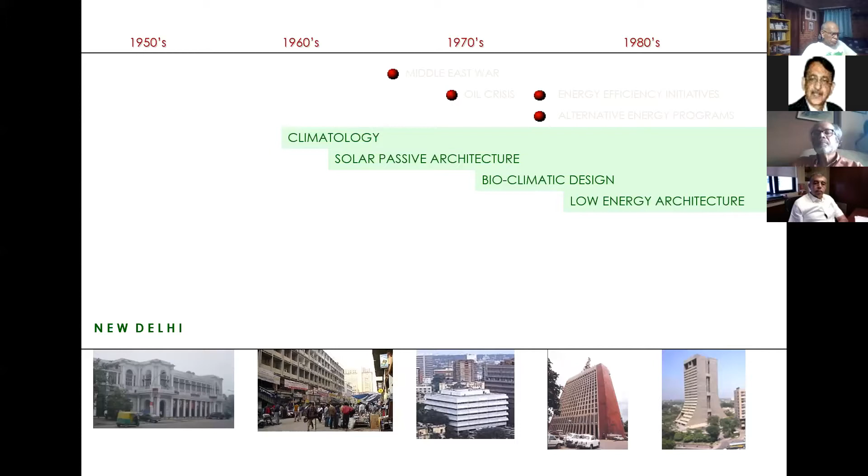They called it solar passive architecture. In Europe, they were talking about catching energy from the sun so that you can warm your spaces and not rely on oil anymore. Then they talked about bioclimatic design when this concept got referred to different parts of the world. And as you realize that oil is actually a limited resource in the final analysis, there had to be something called low energy architecture. And this went on.

Eventually, after the Rio conference, the notion that it would have to be broader than simply energy, environmentally sustainable architecture, was born. Later, as the developing world started growing rapidly, especially the tigers of the Southeast, you suddenly realize there's going to be so much building that architecture has to play a part in the strategy for sustainable development of these societies, these aspirational societies across South America, now Africa, and the East. So that's a very brief history of how you move from climatology to architecture for sustainable development.

Well, you can see these two pictures. What we see at the bottom is at the expense of what we saw at the top of this picture. That was the death of the environment of the seas. With the rapidity and the scale of production of the built environment, which is causing environmental degradation and ecological stress, now a designer must also necessarily become a steward of the environment.

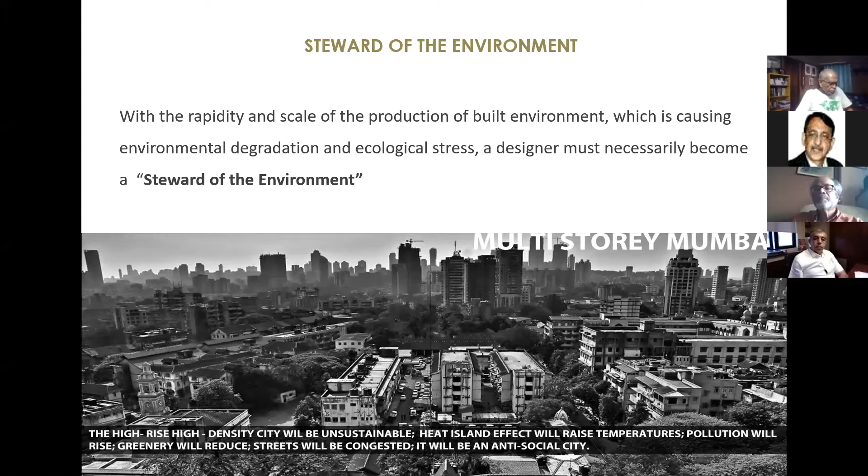So here we are. These are the three realms I'm talking about. That architecture is and will always remain a cultural artifact, equivalent to poetry and music and song. And that is where it actually has its communicative power.

But in doing so, it must also be a development practice. It must be done in ways that promote development of society, looking at its current issues that concern most of us citizens, and then finding solutions for them. And in doing that, it must also be a stewardship of the environment that architecture grows out of.

So what I'm going to do is share some projects, some more complex, some built and some not built, because I think even when something is not built, its ideas are worthwhile and worth sharing with you all.

So this is a tiny little project called Butterflies for an NGO on the outskirts of Delhi in an urban village, squeezed in a rapidly changing urban village in a long, narrow plot. It's a society that is looking after street children and providing them wherewithal to grow into independent, skilled persons.

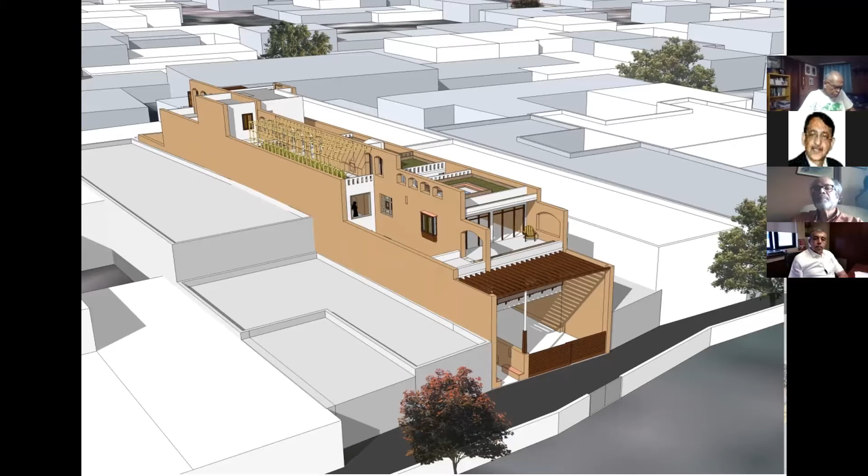So the first thing about it was, it's a long, narrow plot serviced by a narrow lane. We are densifying an existing urban village. What should we do? How do we go about it? What is the morphology of densification that we can develop?

Within this lane, there is a long plot, and on the edge of this plot there's an inner lane. This inner lane effectively connects three buildings around tiny courtyards. So this is like discovering a morphology that will be climatically suitable and maintain pretty good densities with good light, ventilation, and everything, and also accommodate a variety of functions within, just like the old city used to do.

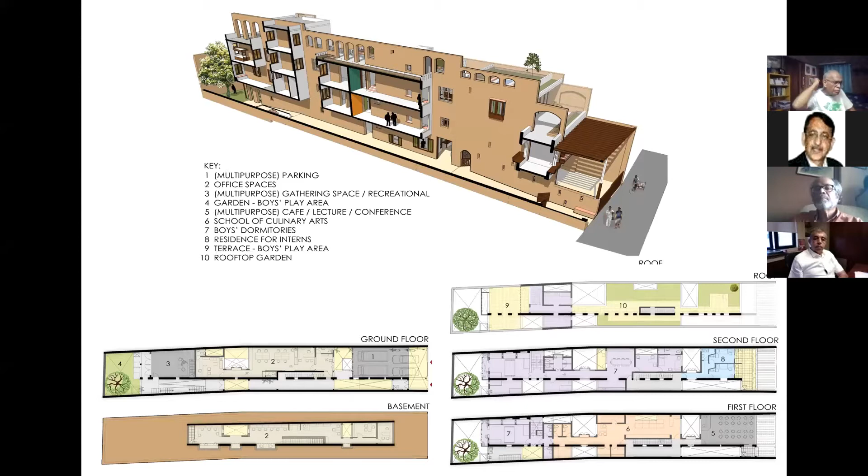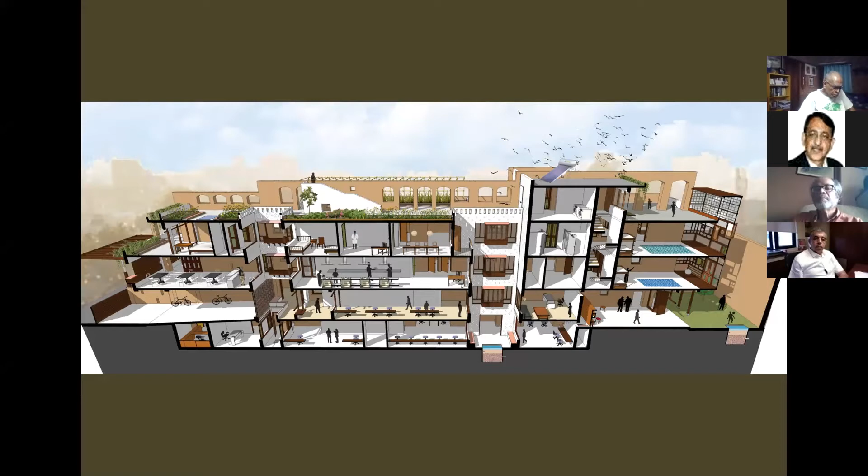So here you can see two courtyards bringing light and air even down to a basement. The basement was a kind of resource - it was where the earth came out from, and that earth could then be converted into earth blocks, cement stabilized earth blocks that could be used for raising the building.

So the idea is that as an existing city or urban village regenerates, actually what's happening is a lot of stuff is being taken down and a lot of stuff is being built anew. There needs to be an attempt at a circular economy within such urban precincts and urban systems.

So the first thing is, of course, we take the earth out from the ground and convert it into bricks. And then, on the right-hand side, you scout around and see what you can get secondhand - doors, windows, stones, metal - and see if you can incorporate that into your building.

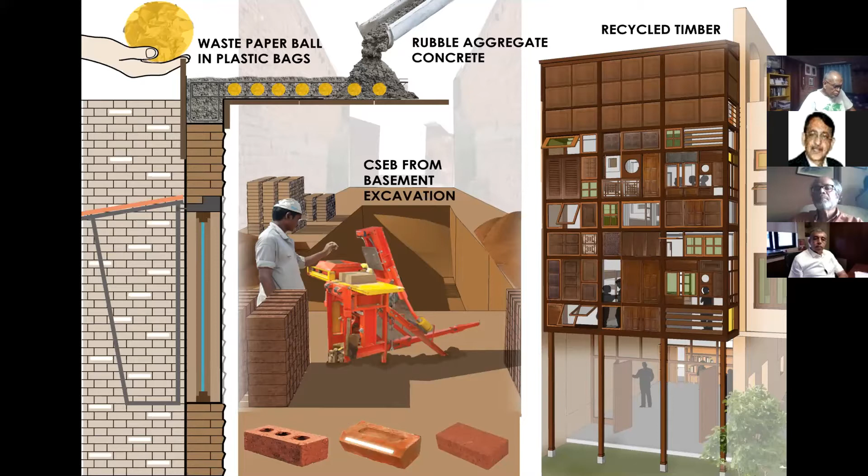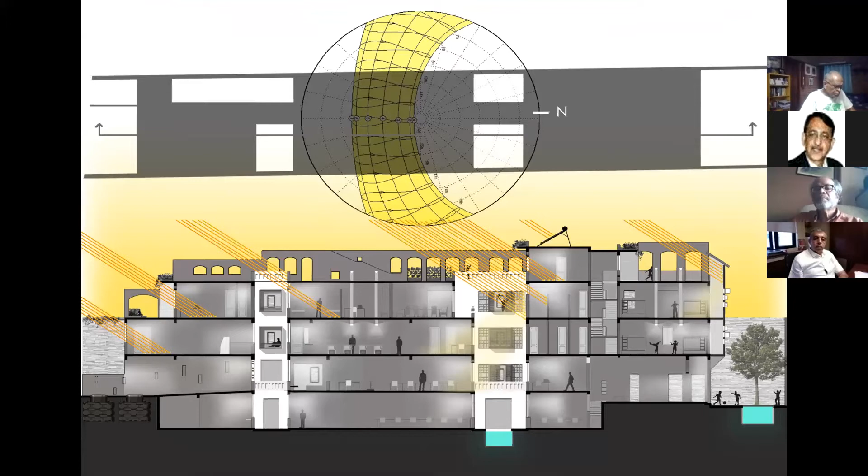And then, as you design very dense, like the old cities, teeny courtyards, you design them in such a way that light does get down to the bottom. In winters, the upper story gets plenty of sunshine, and you can get the air and wind blowing through or flowing across the spaces to maintain reasonable comfort.

And then you make the courtyards very special. You integrate ventilation systems, exhausts, cooling pads, evaporative cooling, a little fountain in the courtyard as a way of producing reasonable comfort without air conditioning in the spaces of different kinds of uses.

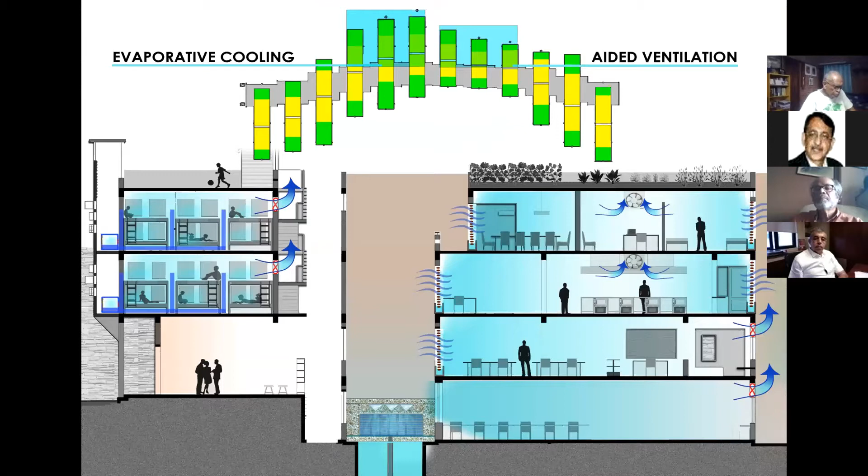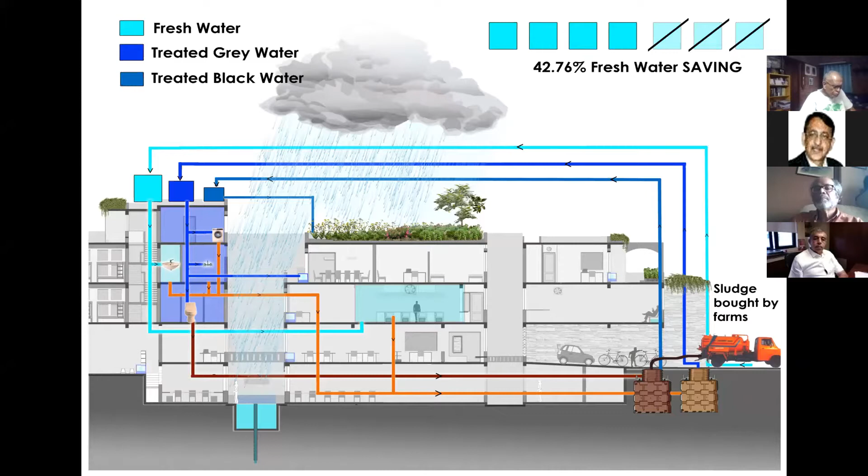And you will also have a rooftop, which will then convert into a vegetable garden. Within that plot, you must see how you handle water - how you collect the rain, how you use that water, store it, utilize it, treat it, recirculate it, and then use it again for your roof garden and for flushing.

Well, this is how we imagined the children's dormitory to be. And here are the kids now peeping out from their dormitories with secondhand windows, as you can see. Everything is gathered from the local market, believe it or not.

And this is the middle courtyard. We were lucky sometimes to get some really beautiful doors and windows too - we just scout around in the local market.

And the little courtyards - you can see how little courtyards can do wonders in a climate like Delhi. And on the rooftop, you can add solar PV.

And here you can see how the earth blocks are part of the interior spaces, for people to know that this building is built majorly out of the material that came out from the basement.

It's an aspirational building. This staircase on the right-hand side is on the roof, and it leads to the sky. Believe it or not, that's where children like to be most. So it's not only about the recycling, the materials and the climatology, it's about how it produces a certain sense of well-being as you connect with the environment around you.

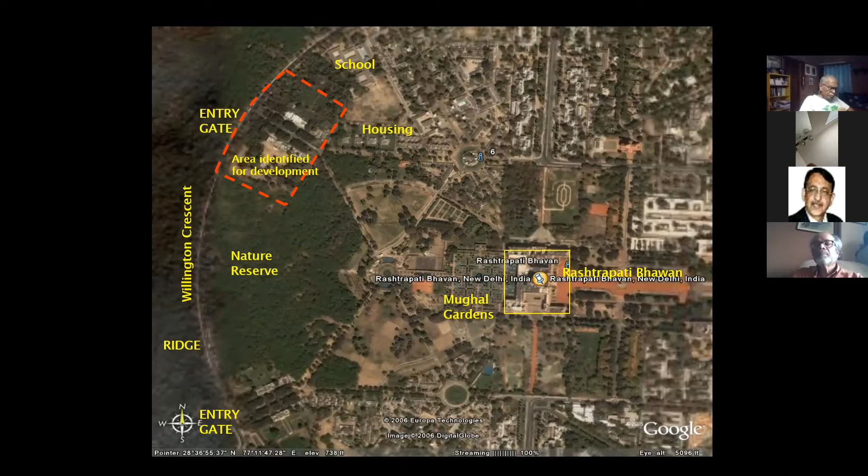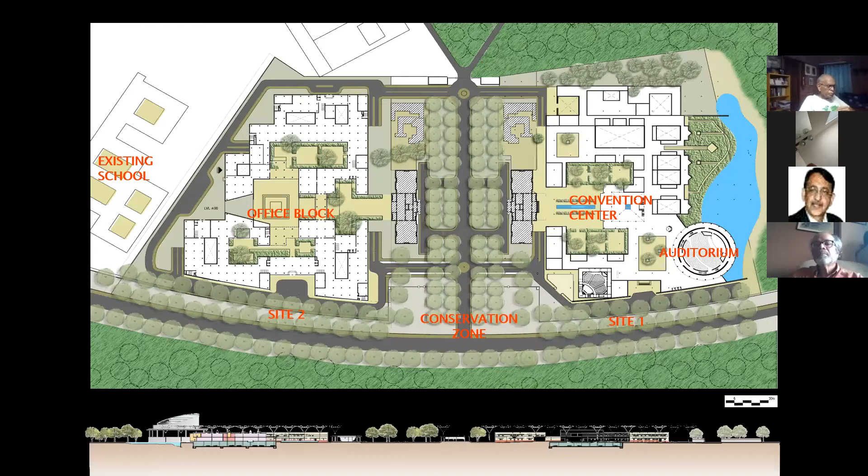This was an imagination which perhaps was an extension of the idea produced by Joseph Stein at the Habitat Center in Delhi, which was that it's an urban space, but an urban space with a difference. It has a convention center and a set of office blocks.

The structural grid of this entire space is actually a set of columns that carry photovoltaic trees as a rooftop. So here you have a city in which you have 3 to 3.5 stories high columns carrying solar PV arrays, under which the public spaces of the city can stay, and occasionally these trees give way to natural trees and larger spaces within. So the photovoltaic trees provide the shade as well as the electricity.

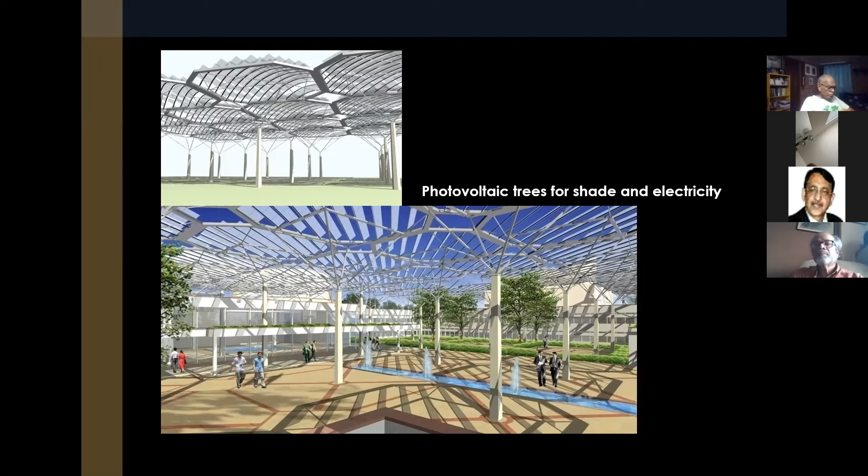In section, this is how it looks. Again, the idea was that you excavate a basement and produce most of the building material for the walls, etc., using the material that comes out from the basement. And the rooftop, once again, becomes a shaded garden under the solar PV trees.

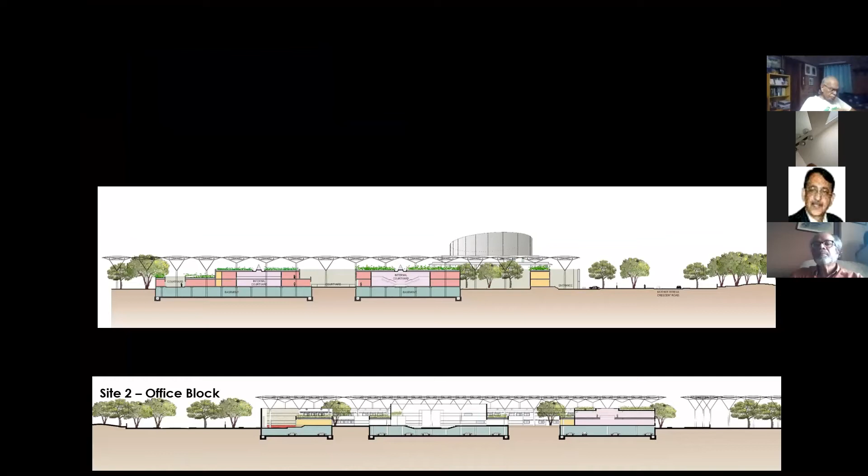Well, this is just a test. It so happened that President Kalam didn't stay on as president long enough to see his dream through, and the project was shelved. Many good ideas have that ending. But nevertheless, I think there are important lessons.

Here is a kind of a bird's eye view of the solar PV trees spreading across the urban realm, and a new kind of urbanism for a future solar city.

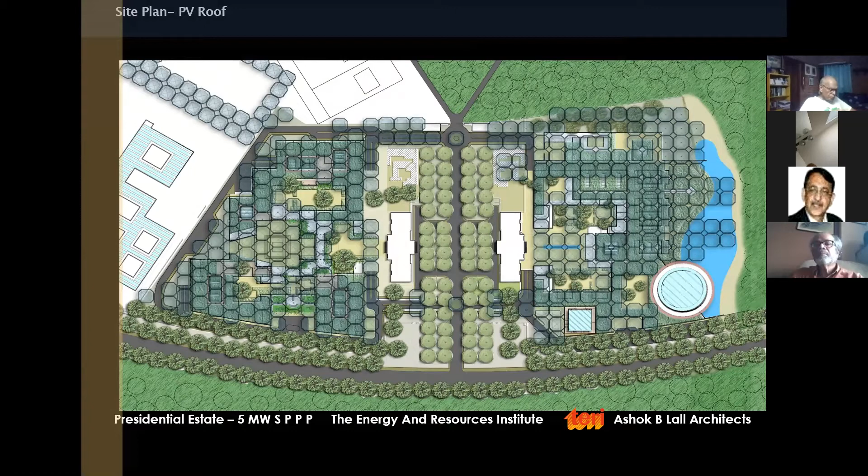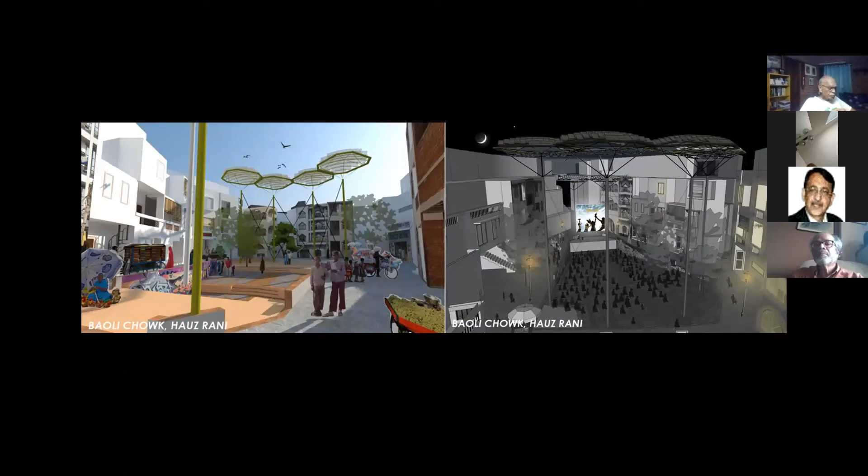There you are. And you can extend that idea even to urban villages, like in this proposal for the rejuvenation of one of the urban villages in Delhi.

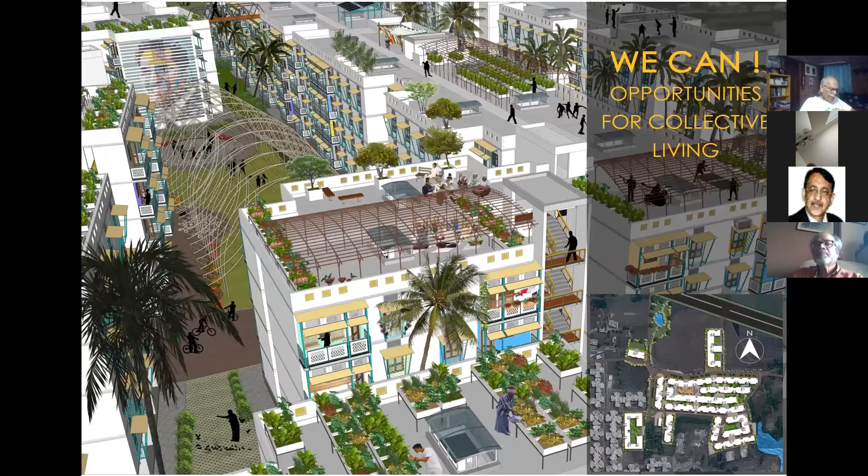Well, I'm just going to move on now to housing. Just talk about it because it really is the biggest challenge that we face as we urbanize—homes for everyone. And I call it opportunities for collective living. That's the way I characterize it.

And when it comes to housing, especially as we urbanize, as we seek a way in which the poorer sections of our citizenry have the possibility of looking for a better future within this generation, not 2, not 3, but within this generation, we have to look at the aspirational trajectory that everybody is on. We have to take care of their basic necessities. We have to provide for their psychological aspirations. And we have to give them a space in the city where they can build a life of self-fulfillment. That's what housing is about. It's not a numbers game.

It is not PMAY supported by so much subsidy on whatever you call it. It's not about high density, high rise, because that's the numbers we need. It's about producing a future society who enjoy the spaces they live in, where they find self-fulfillment. Well, what we do when we build, we have to ensure the basics: health and sanitation, safety, and sustainability. That means water security, energy security, land security, with biodiversity, and a way of treating your waste so that you can build it into a local circular economy. And out of that can arise the possibility of a life of self-esteem.

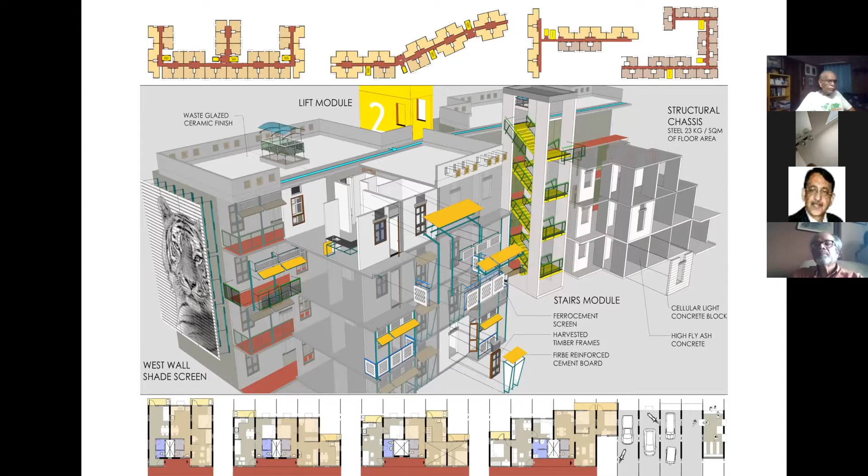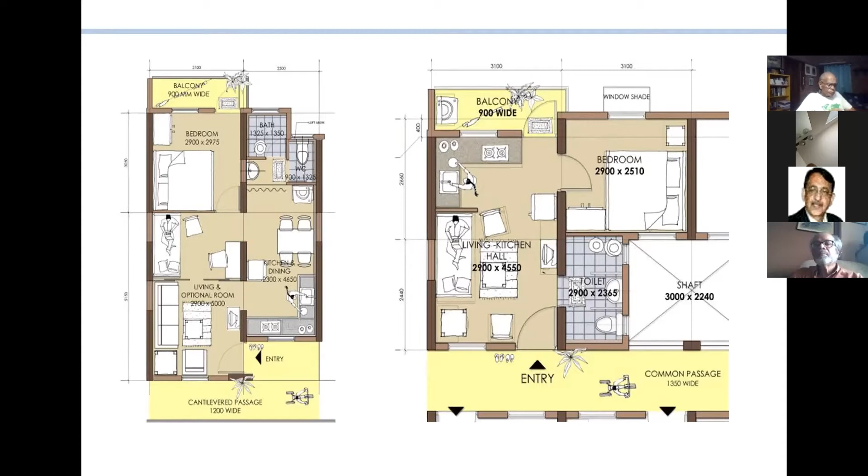And as you design, you must design as if you're living in those spaces. You must visualize every activity, whether it is cooking or lying down or meeting people or doing whatever. But I see so many layout plans with these transferred icons of furniture and so forth, that look like somewhere in the United States or whatever. They don't imagine life being lived inside. It's only when you test the design by this kind of drawing that you know what you're doing.

And not only should you design for now, the systems should design for a changing future. This happened in Singapore. Buildings that were built in the 1960s and 70s are now being reworked internally to increase the sizes of homes. And here too, we see this happening in old buildings and even in housing schemes that are being, if you look at the DDA housing scheme, my God, the amount of changes they are going through in Delhi, it's because they're responding to real needs and because standards of living have improved.

And so the design of the building system should anticipate the potential of reconfiguration of spaces over a period of time.

This run towards all RCC construction that we are seeing today, I don't know why we are doing it. It's not serving environment. It is not serving society. It's not serving patterns of living. It is not serving a formation of a habitable city with streets. It's producing something that we'll regret for 70 years to come as we build these buildings. We really must think hard about that.

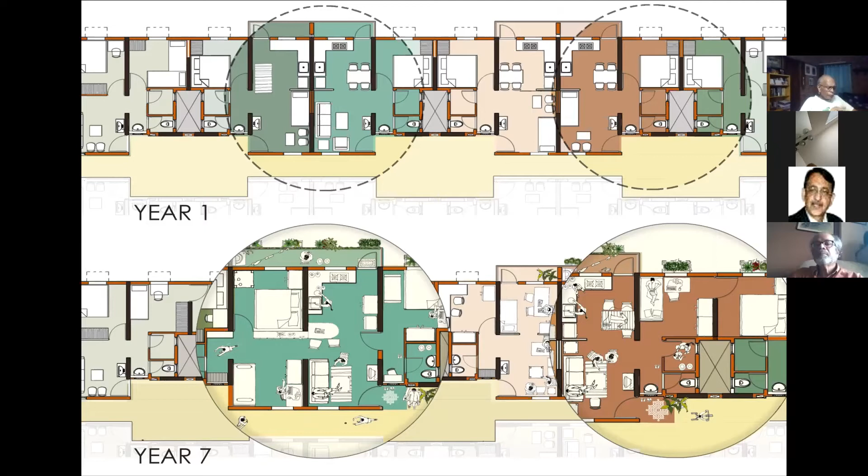This is the kind of building that we can have, a series of places, 4 to 5 stories high. And here, of course, you try and lay everything out according to the priorities of orientation so that you can protect yourself as much as possible from the blistering sun.

And so there are 3 levels. We care, we take care of the social needs. We take care of the family. Imagine family life being lived. Look at this bathroom. It shows a person bathing a child, a lady bathing a child. Now that's what is needed, or a person bathing an elderly person. That's what the bathroom is for. You must imagine how life will be lived for several generations living together.

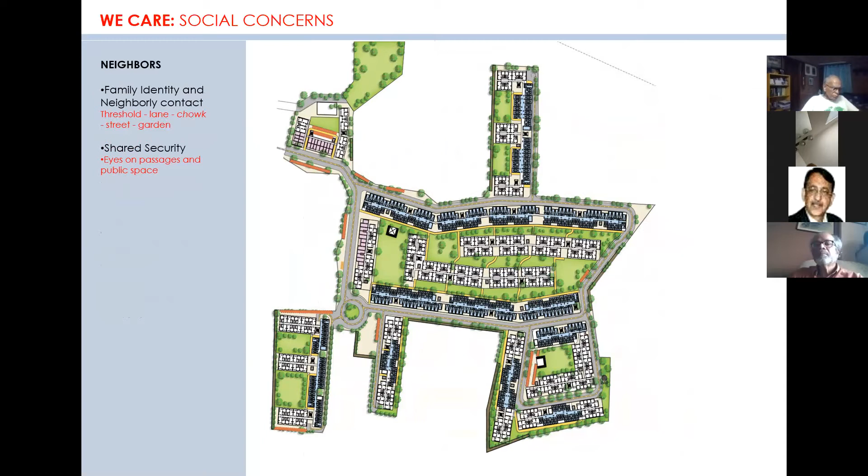You must imagine how neighbors will live with each other, how neighborhoods will be formed. What will be the sense of shared security? What will be the sense of neighborliness? How do spaces create communities and neighbors?

Again, it's not just about numbers. I must emphasize this again and again. It's about buildings that you can walk through from one building to the next, through the courtyard, and form a street and so on, so that you feel you're living in a lived-in environment, not a packed-in environment, but a lived-in environment.

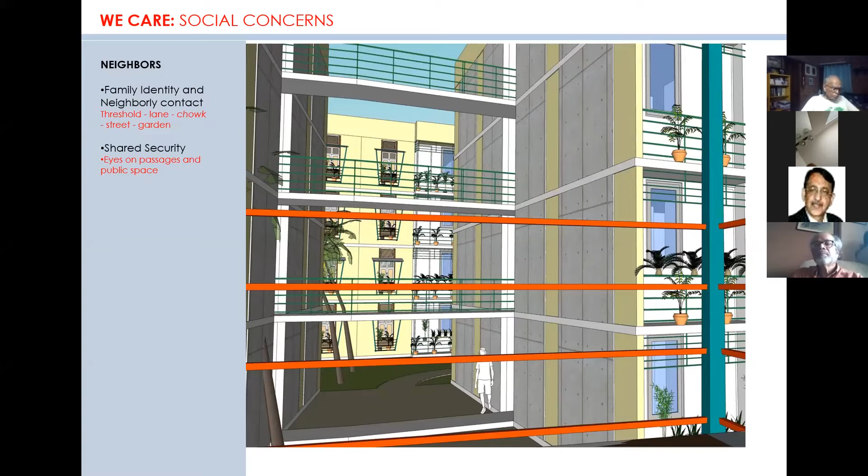And of course, we care. First responsibility is to make sure that health and hygiene are protected, that you'll have clean air, thermal comfort, a waste disposal system built into your design, that waterborne diseases will not be present, drainage should be good, and safe drinking water must be guaranteed.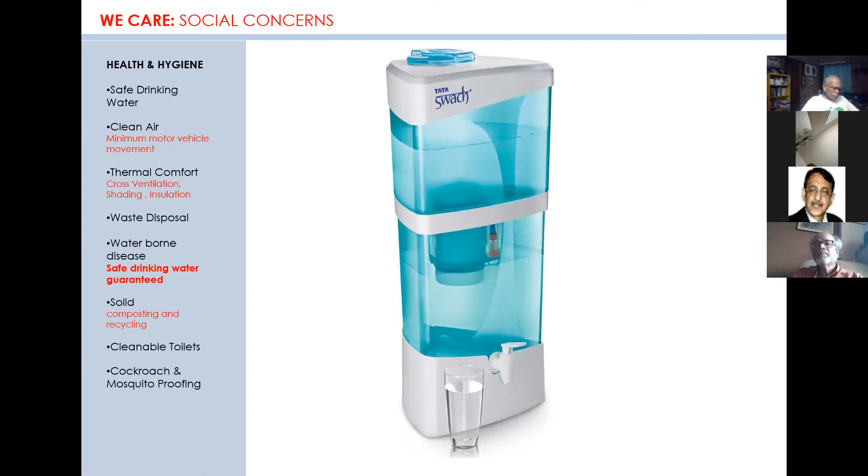Composting must happen on site, and toilets must be easy to clean, and you must build in ways that keep cockroaches and mosquitoes out of the house. All this to be affordable. And of course, take care of the elderly, universal design.

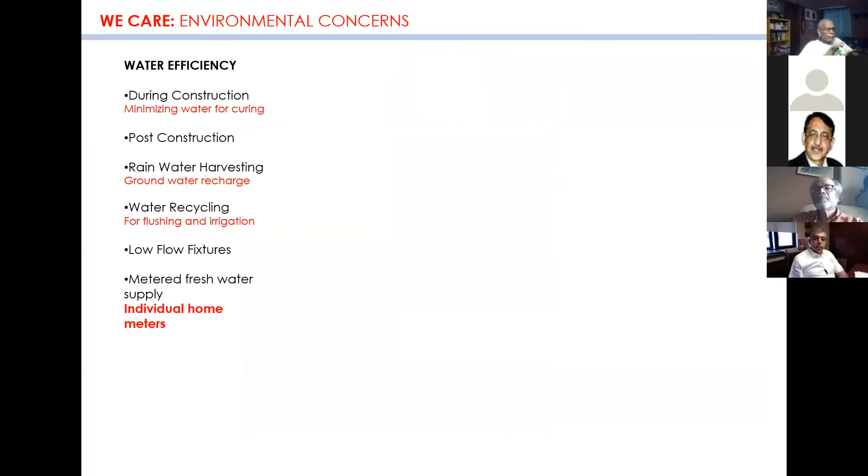Three basic issues: water efficiency, energy efficiency, and maintenance and regulation of a services infrastructure. These systems need to be set up and maintained with religious sincerity. At the moment, they become little businesses with a lot of fighting in residents' associations about who controls the money. The basic intent is forgotten.

How do we build that culture? We as designers of the built environment. I think this is where institutions like the IGBC have a strong role to play. How do you create that culture amongst the new societies, the new communities being formed in these housing estates, so that they can care for their environment as a collective?

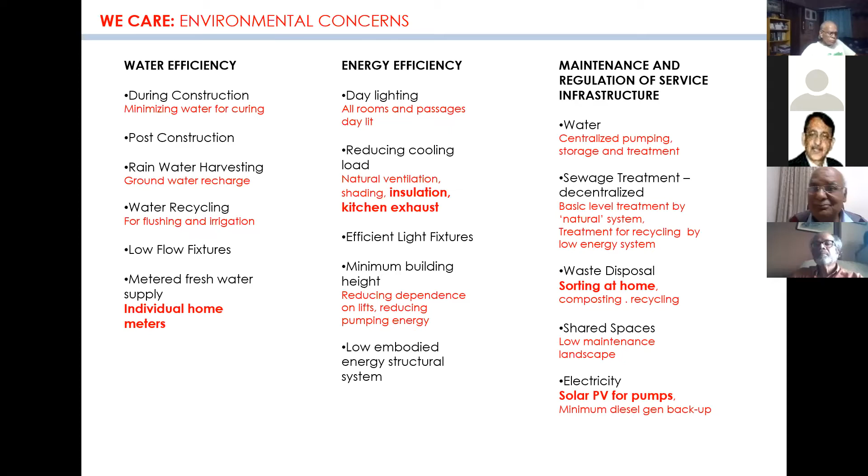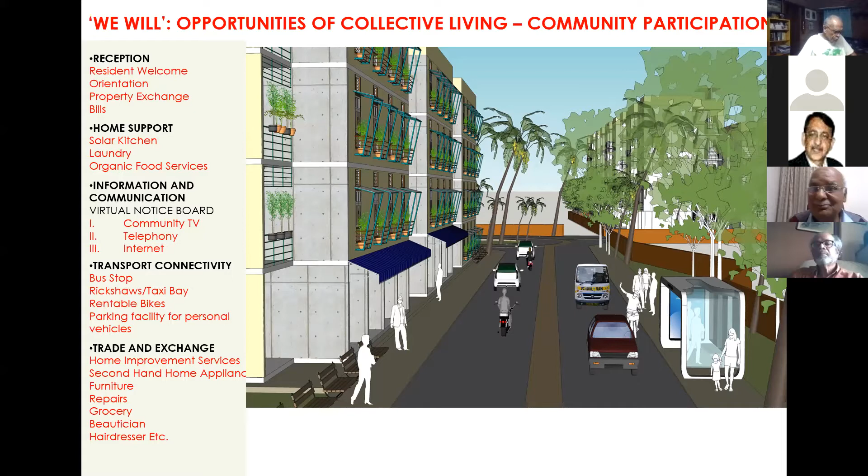And as you establish, you need all these things. You need a system of receiving people, a system of supporting people as they set up their home, a system of information and communication amongst the residents of a community. You need transport connectivity—now you have bargaining power as a group of people living in an estate with the transport authorities or other providers to make your connectivity much better. And you also need to connect with trade and exchange of various things you need to set up your life quickly in the new housing environment.

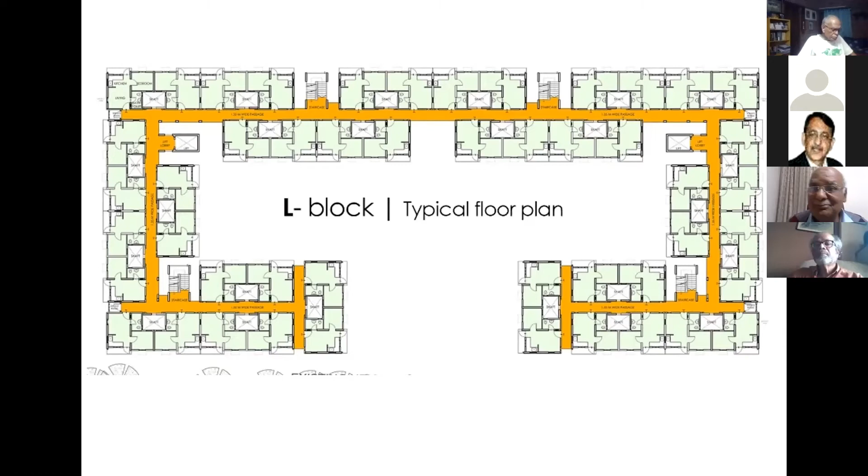Here's an interesting idea. When we were building a block of flats in Chennai, people said they don't like to live upstairs. But if you design it as streets in the air, like this was done, very soon we found it was working because people had more neighbors and children could tricycle up and down these little passages and make friends. And this is how it has worked.

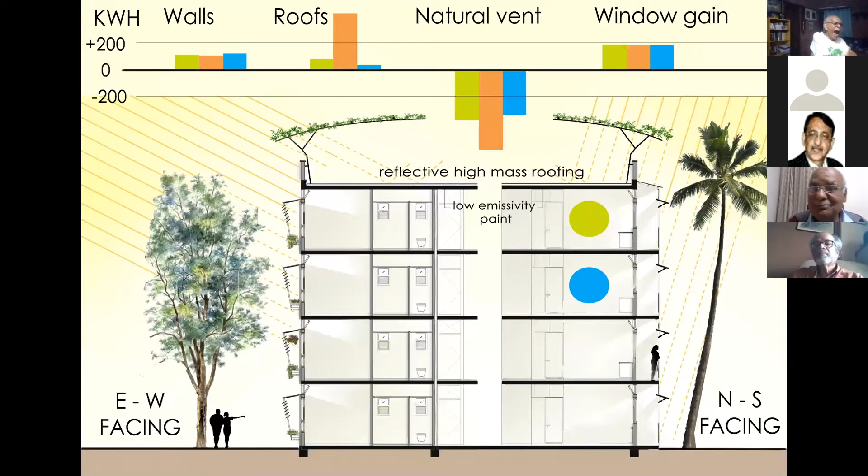And of course, even plantation has to take care of how it integrates with the buildings, and the water system is integrated. This is important: if you're building, say, 300 to 400 homes together, all this waste composting and recycling, and treatment of waterborne waste and recycling, actually becomes affordable for affordable housing, for low-cost housing.

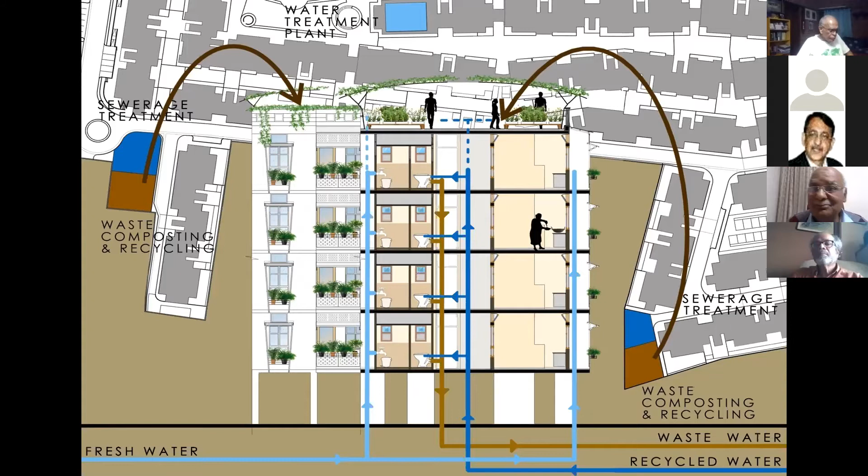But here's the biggest difficulty of designing for an anonymous client in housing systems. Really difficult. How do you assume what people need and what they want, and how their needs vary from household to household? So in another project, we actually tried to work out alternatives.

We had focus group meetings with prospective clients or buyers, and gave each house a particular name. Then we discussed with different groups—young boys, young girls, ladies, elderlies, and the income earners for the family—to take their different views. We gave them a kit to organize their internal spaces. Interestingly, no two internal house designs were the same. None of them was the same. Everybody had slightly different requirements. So a design for flexibility somehow is essential.

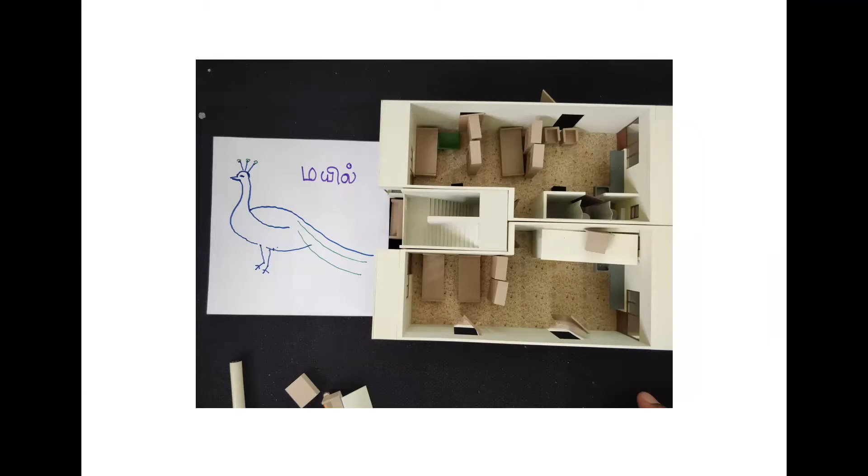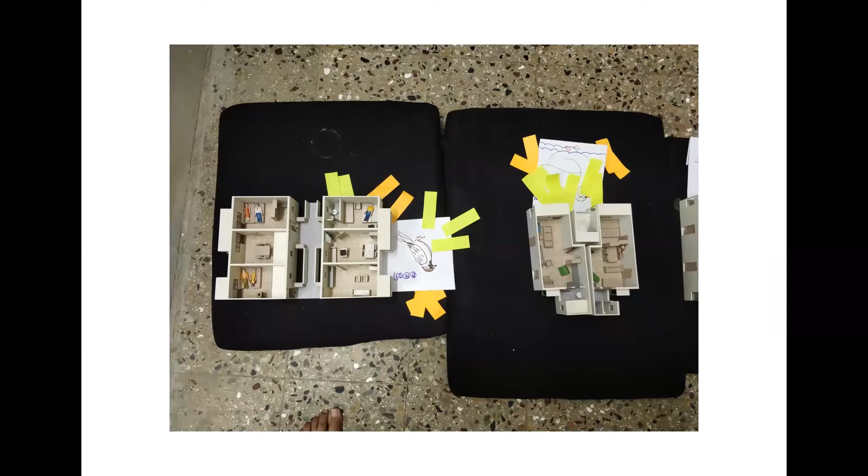This is how it was. And then people voted on which of these types they thought would work best for them. This is how we made a selection for this next project.

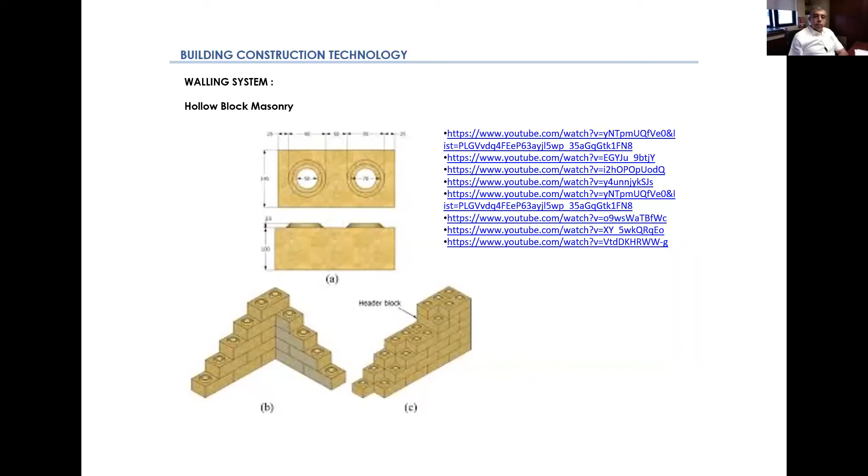Of course, there's building construction. Here we evolved a new way of building using not earth blocks, but concrete blocks that interlock. Very thin walls, 150 to 170 millimeters wide, that can be assembled very quickly and partially reinforced.

And this system has now been tested. Very low steel consumption, 2.3 kilograms of steel per square foot of built area, and similarly flooring systems.

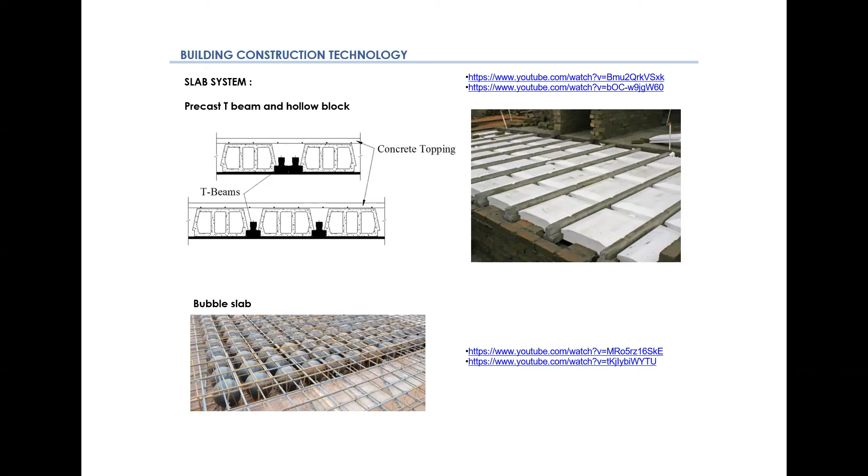But then, this is what we are looking for. You should build a prototype if you're building using a new technology, equip it as if you're going to live in it fully, and then actually live in it.

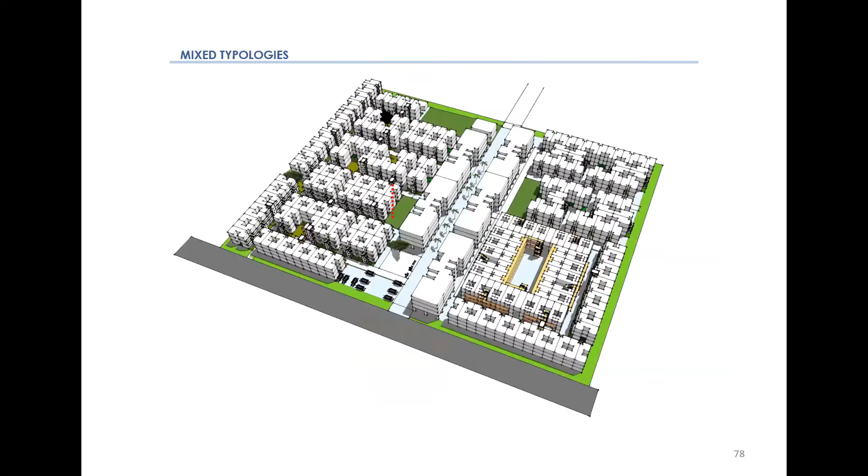The important thing we realized was there's no such thing as one size fits all. In any community, there will have to be more than 2 or 3 types of homes and buildings. That is what creates an urban fabric that is varied and lively.

And this is another thing that's now been established, that you can actually very easily, if you've got say 300, 400 units, design for decentralized supply of water and electricity also.

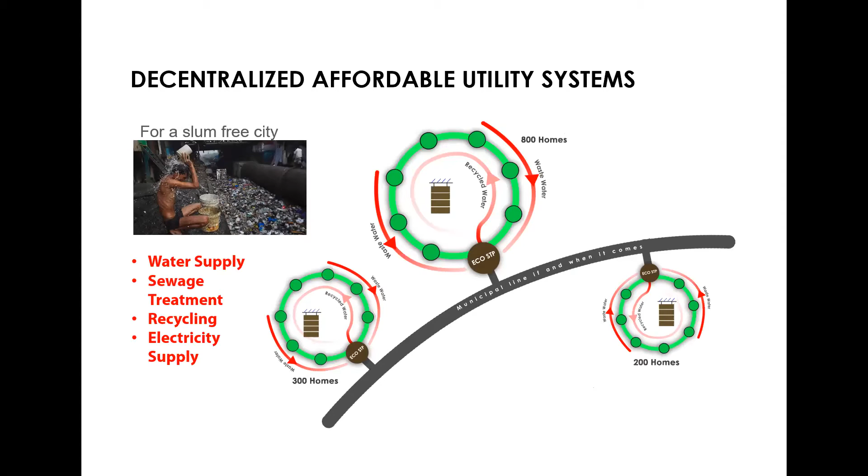A community is established, and I call it the opportunity for collective living. You cannot do for yourself if you were to build each one your own little slum house. What you can do if you come together as a community is much more. And I think that's the secret of urban life.

Well, this is a general statement, and I just wanted to read it out aloud. It goes against the grain of what is happening in our country at the moment. It says that if the conception of the city is that it is an instrument of wealth generation through the exploitation of land by real estate, then, this is my conclusion, we are doomed to perpetuation of a divided city where half the population will live under environmental and legal stress.

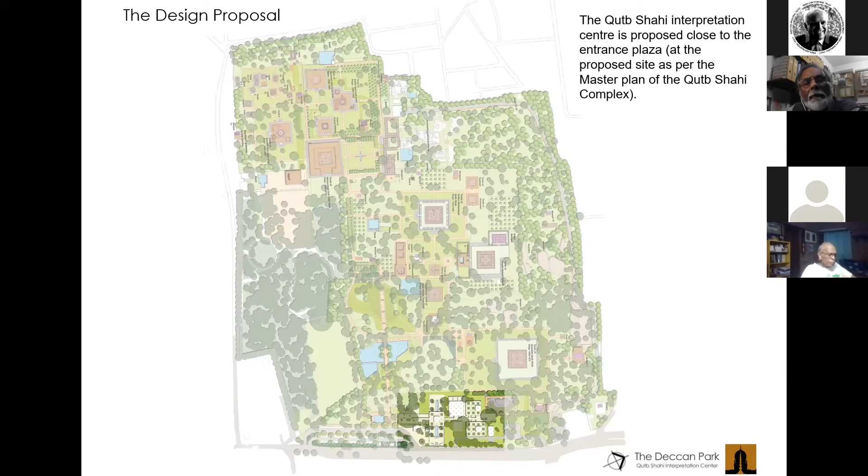Let me share with you another project that didn't get built. This was the design for a museum, an interpretation center for the Qutb Shahi tombs in Hyderabad. An Aga Khan promoted idea, a competition, where at the bottom you have a little space where you had to build this center, and an amazing set of commemorative monuments spread out on this park, brought together beautifully by a landscape design by Professor Shaheer. The idea was to somehow fit into that seamlessly, yet remember that architecture of the past.

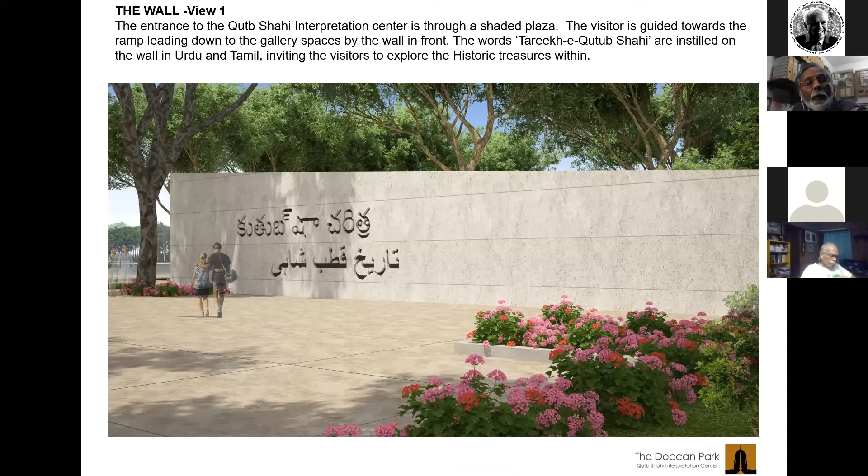So here is the invitation wall, which does not speak in English, but speaks in the local languages. And this is the way into the center, taking a ramp down under the ground.

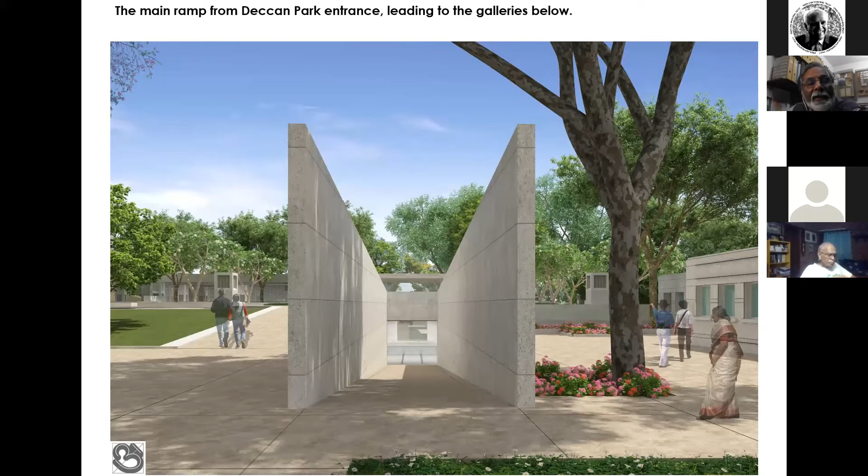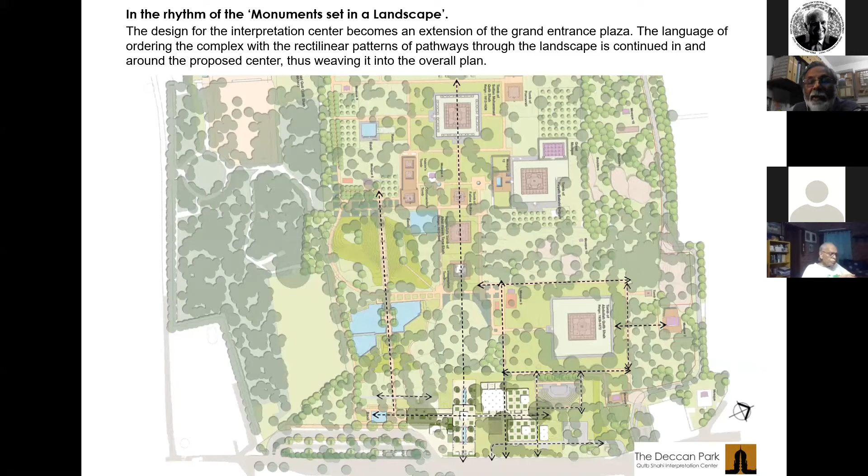Most of it is under the ground with little bits sticking out over the top. The way it is laid out respects and refers to the old monuments and the circulation paths that surround them, as if it is seamless. You produce a garden on the roof of these underground buildings, just like this. The interpretation center is below the paved areas, and these little projections above have a particular function, which you will see in a minute.

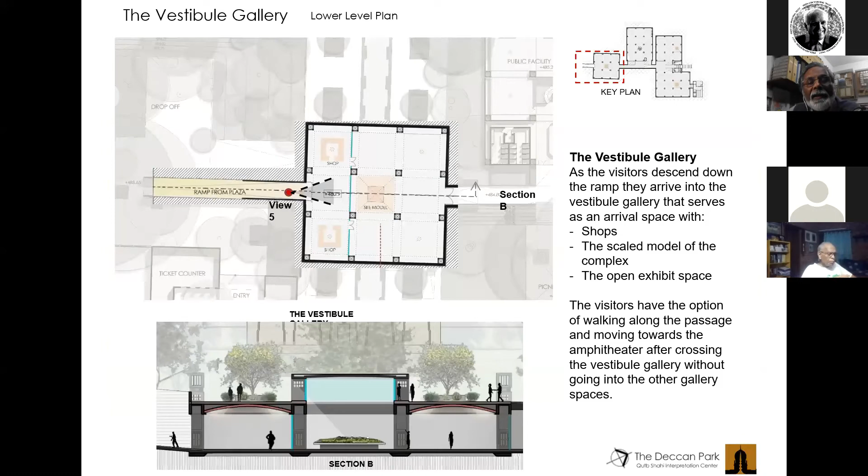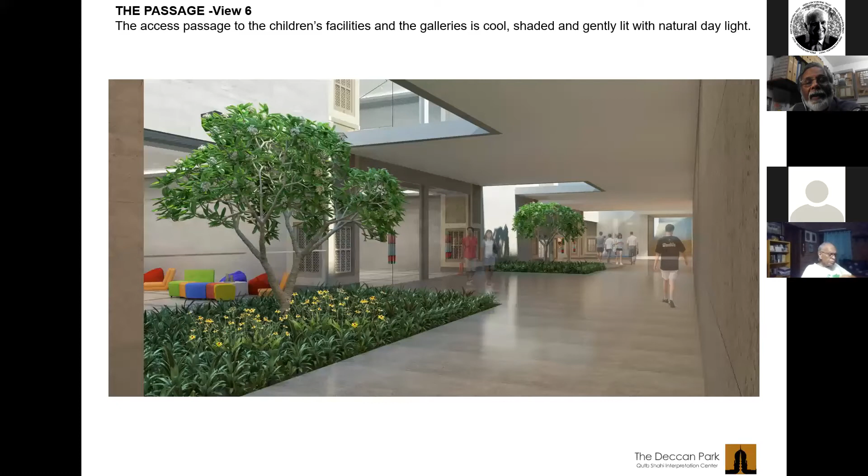Here you are in one of the galleries, and the middle portion pops up, gets the daylight in, and punctures into little courtyards, lighting the basement spaces.

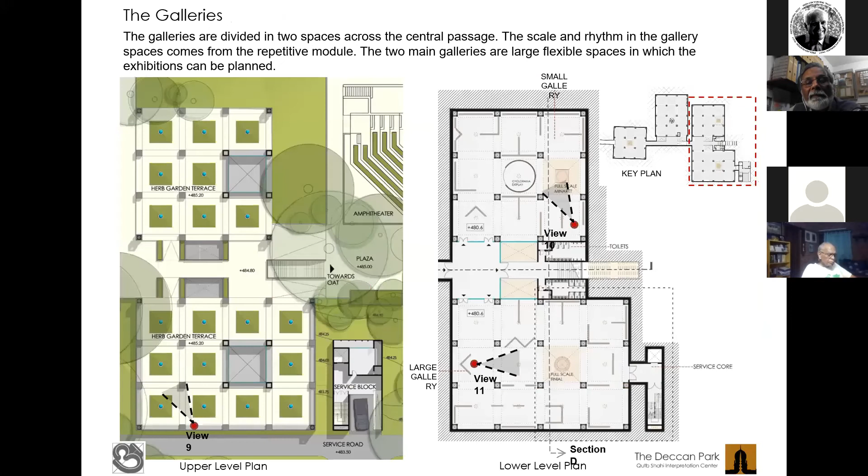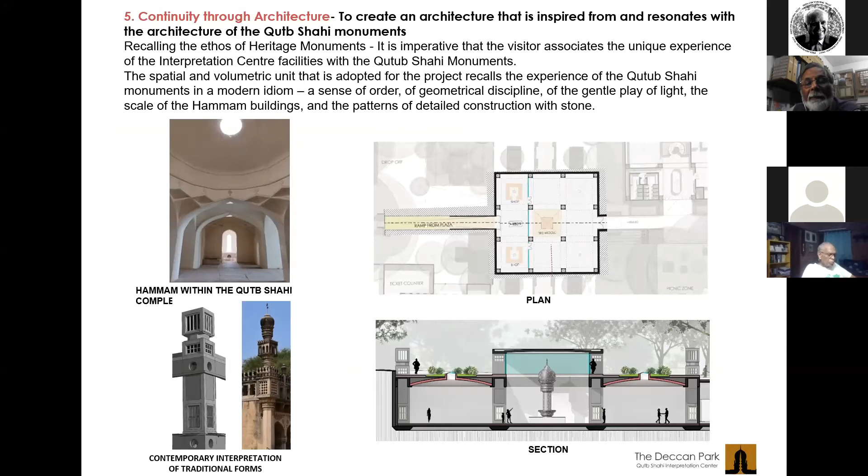But this is what I really want to talk about: how do you build this? On the left-hand side, you see some decorative features in the existing buildings. That idea is picked up, along with the idea of building domes, something that has existed in Western UP and Haryana for over a century now. These are masons who can build shallow domes without shuttering, where the rise of the dome is just 1 inch every foot - a 1 in 12 rise. They don't even need to draw it or put up scaffolding. They have it in their muscles and their bones. They just do it automatically.

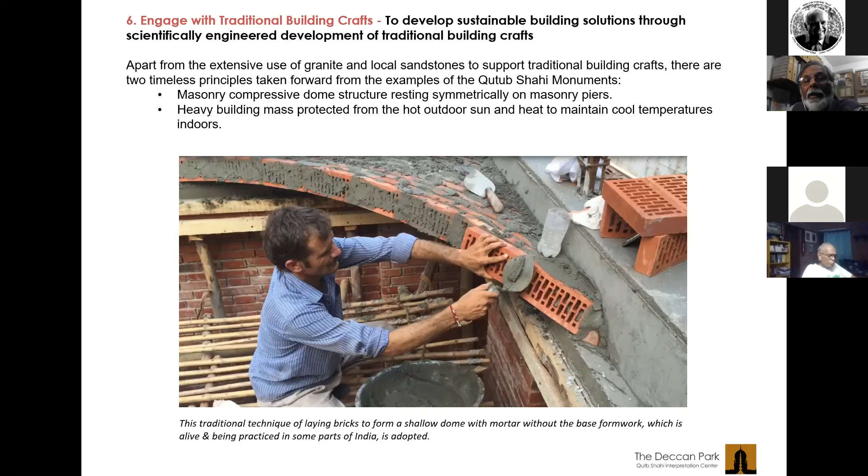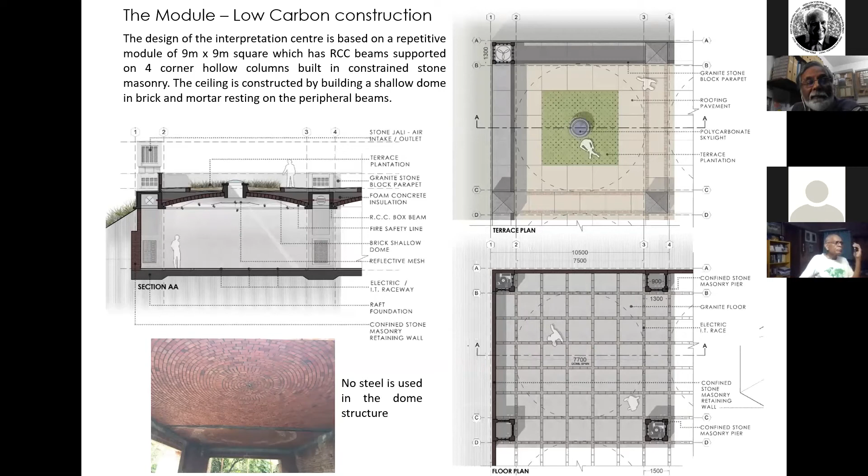So the idea is you build a compressive structure using these masons without any steel, as the domes to the galleries. So you reduce your environmental footprint - no steel used. All the retaining walls are made out of stone, no steel used.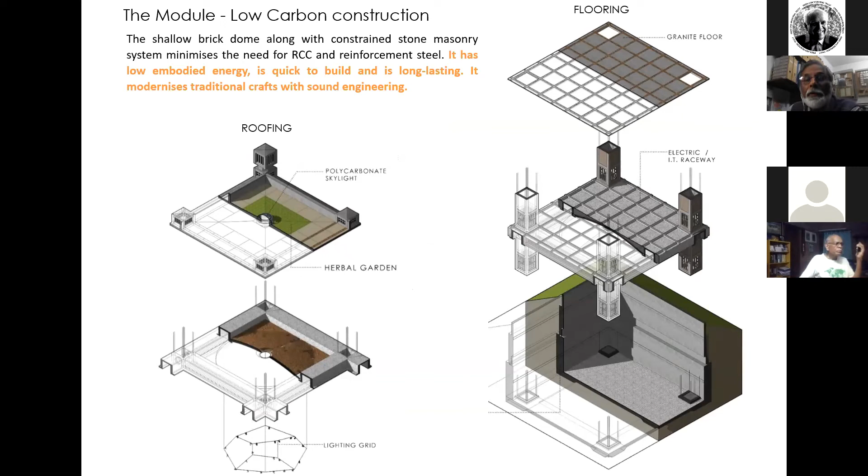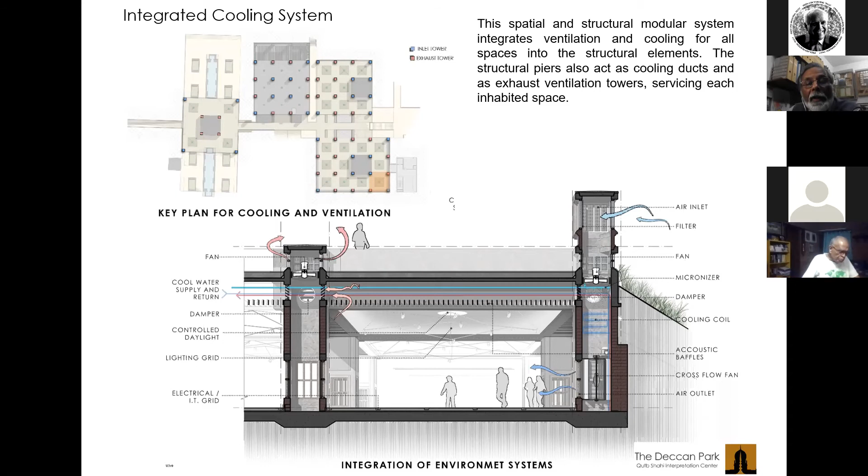And these corners are actually structural columns, but built out of stone, and they also become ventilators, integrated with an evaporative cooling system for circulation of air into the galleries. This circulation, this water, picks on the baolis of the complex. There are 3 or 4 beautiful baolis that have been regenerated once again, and that water can be brought in for cooling the inside spaces of this exhibition gallery underground.

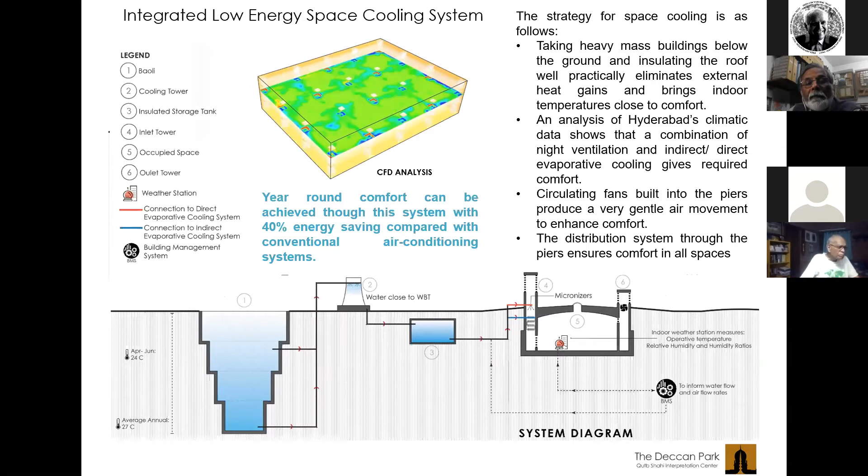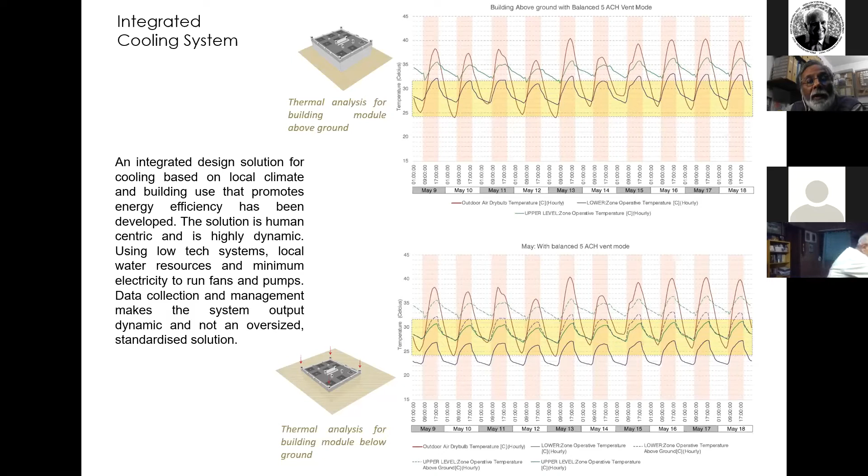And this is not just an idea, it is tested scientifically by simulation. We could see how the indoor temperatures went down substantially when you went underground and when you added evaporative cooling into the ventilation system. So here is a low environmental impact solution to a modern museum.

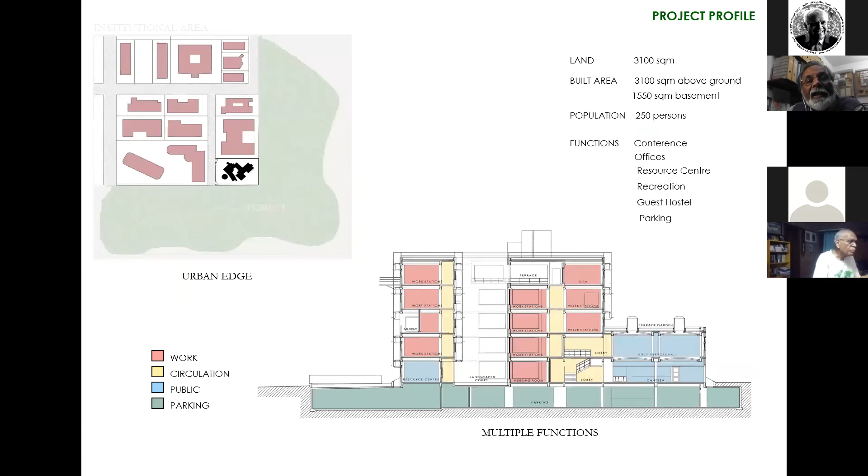Let me now conclude very quickly with a classic building of our office, the Development Alternatives building. Let me just go through it quickly - I just want to point out a few things. One of the big things in this, of course, was that the project was developed out of intensive discussion and consultation with the Development Alternatives community, all members and through the hierarchy of their organization till the decision-making level. Extensive consultation about how they wanted their building to be.

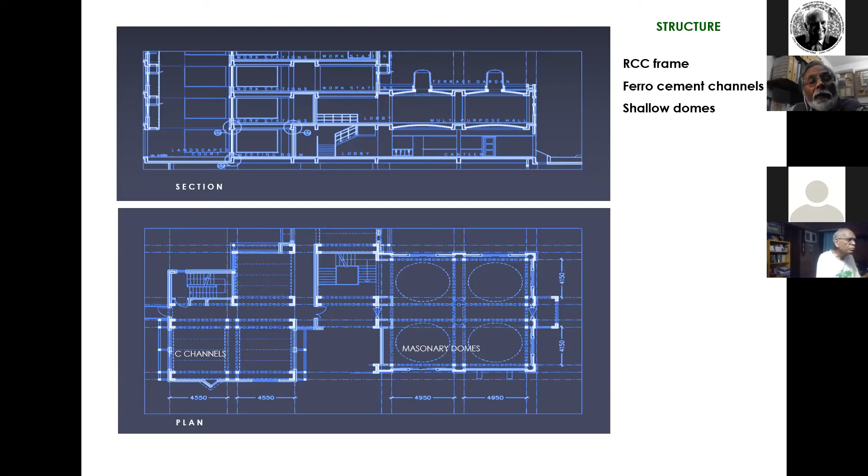And we devised a system using shallow domes and walls to reduce the consumption of steel. We recycled all the earth that came out of the demolished existing building, which was made out of mud. All the earth that came out of it was pulverized and recast into cement stabilized blocks. This, in combination with fly ash blocks, became the infill masonry in a light RCC frame.

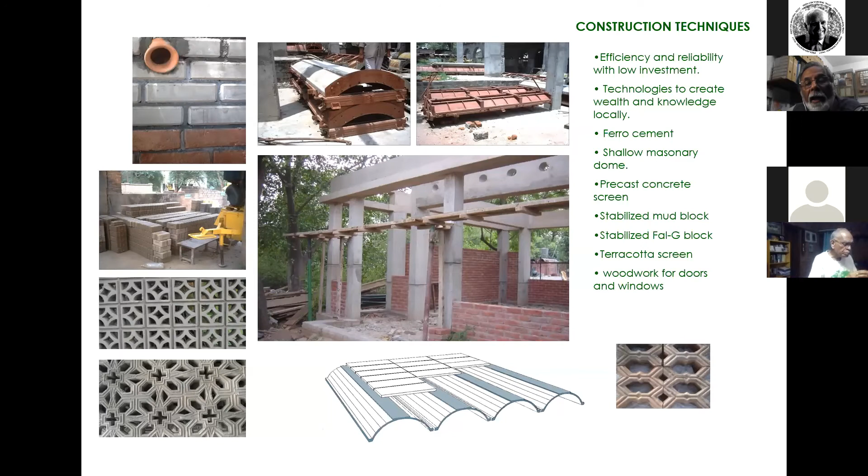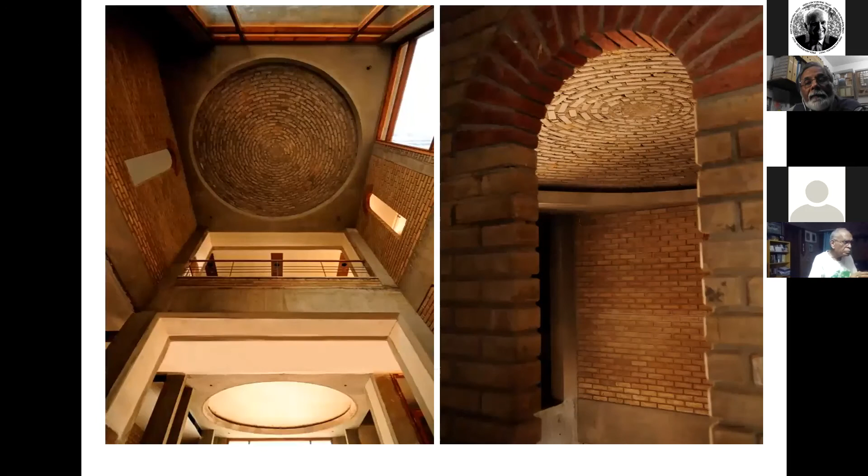And this is how these shallow domes were built, in this case using scaffolding. Here they are - no steel. And this has survived a number of earthquakes already. This is how these shells were made on site and lifted up by a hoist, just a rope and tackle - no big cranes required.

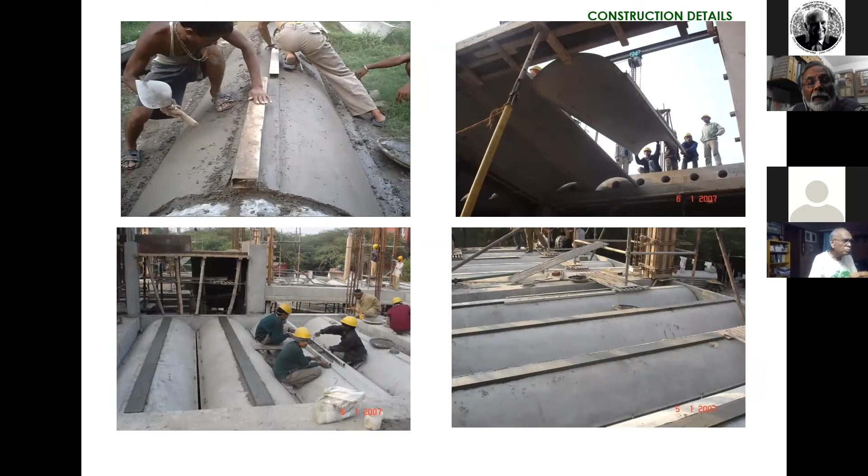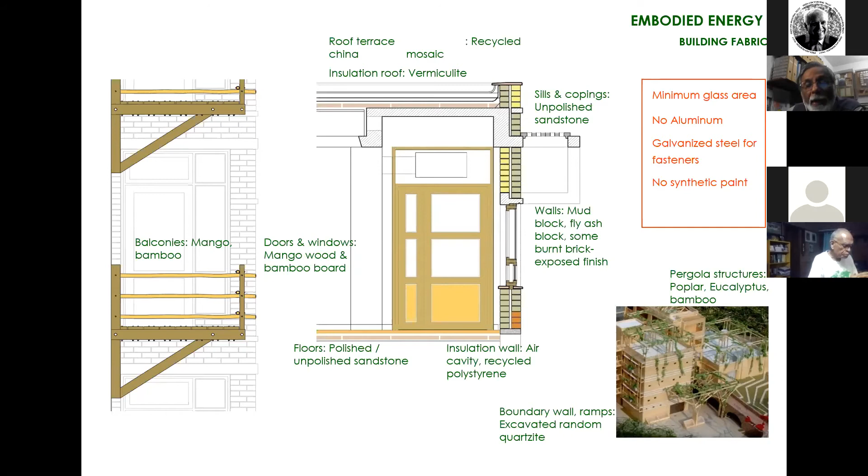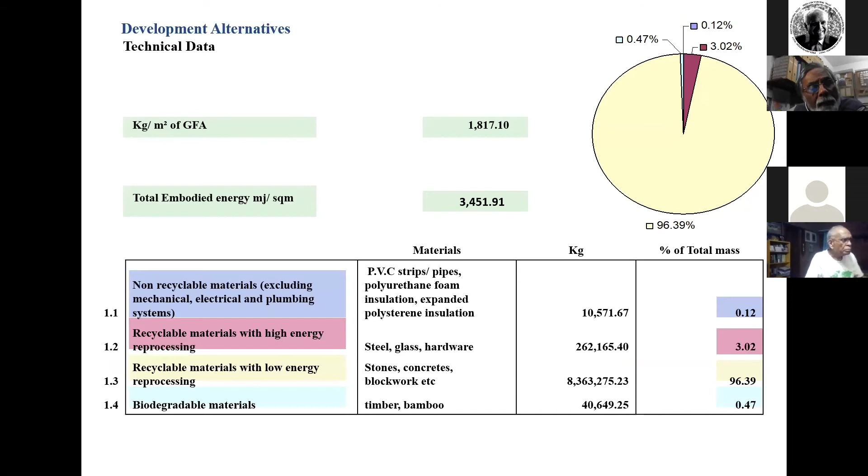So here's the message: use steel most economically. Work out systems that are less dependent on steel. And don't build and commit yourself to building types - whether it is multi-story tall buildings or buildings completely built out of concrete - which are intensive in steel. You are running away from sustainable development.

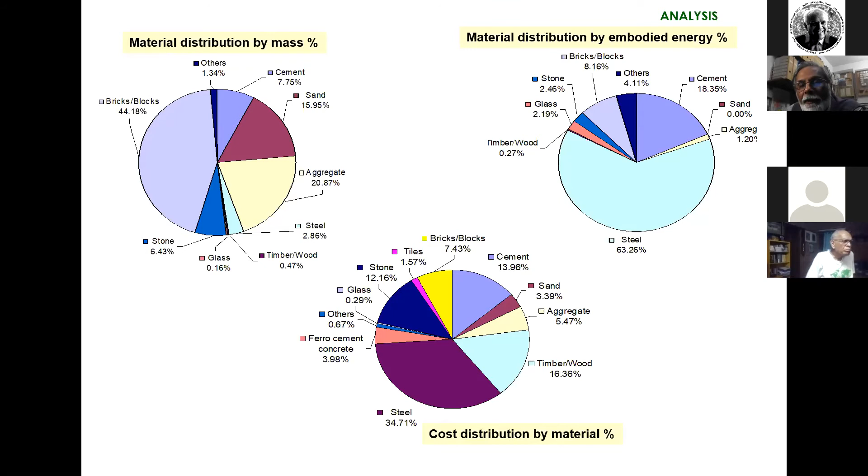Here's another very important principle. If we have to build quickly, we have to industrialize construction. But the industrial principle is to be distinguished from mechanization and automation that displace human agency. Rather, it is to be reconstructed as systems liberating many initiatives and imaginations with the benefit of appropriate technology.

That you see in this roof over here, the shells, etc. These are all semi-industrialized systems where small-scale industry can produce all these objects and vary them according to need. It doesn't displace labor, and it doesn't completely industrialize.

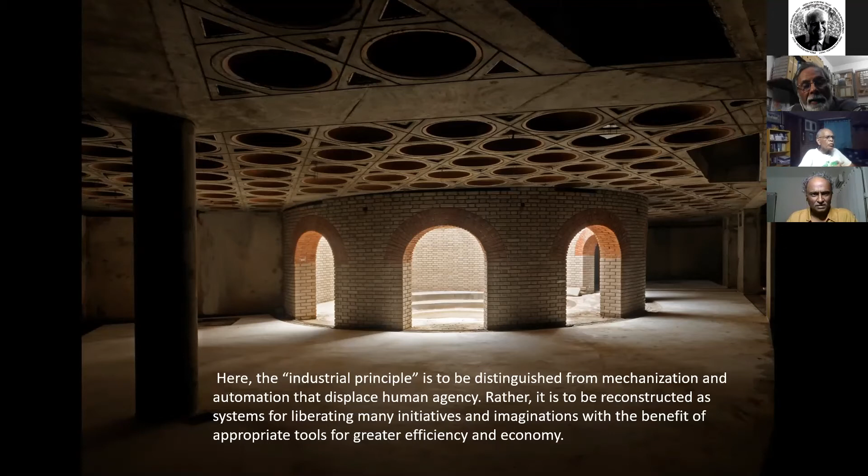We are losing you, Ashok. Yes, Rajanji. I think there is a network problem, sir. Mobile se contact karo. I think we lost Ashok. Doesn't matter, it's already 6:37. There you are, Ashok. We can't hear you, but you have to unmute. Can you unmute him please? You have to unmute Ashok Lall. Have I unmuted now? We can hear you now.